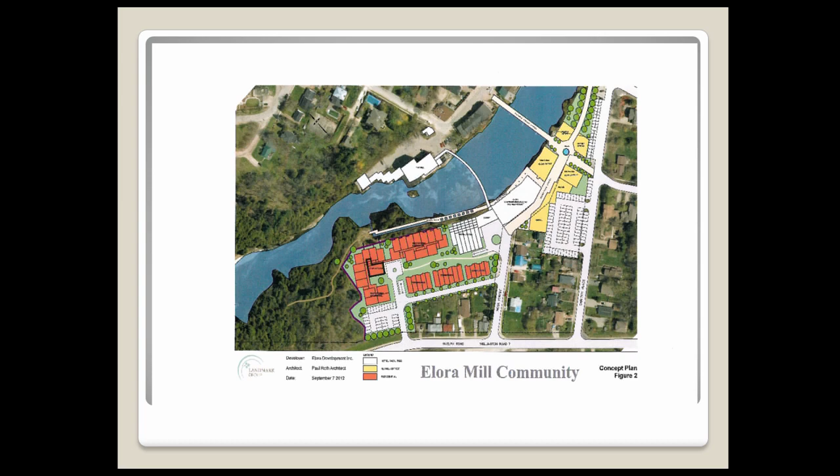We have to excavate considerable rock in that area to create underground parking for the condominiums. If that were to happen, the Potter Foundry would have been taken out of the public realm entirely, becoming the property of the condo association and run by the condo board, which didn't guarantee its integrity going forward. So a second concept was developed.

This is the plan we've been looking at since 2013. We changed the configuration of the building to a U shape so that a courtyard was introduced in the middle. This offered better views for residents in the building, and broke up the building massing along the trail. You can see now that the hotel is more articulated with a pool.

You'll see the activity center on the south side of Wellington 7. That will be a construction staging area for the condominium work, but ultimately function as an activity center administering winter activities on the GRCA land, which we butt right up against on the south side. We've been in talks with GRCA about extending those uses, things like snowshoeing, cross-country skiing, possibly dog sledding, just to create that enticement for people to come out and visit in the winter.

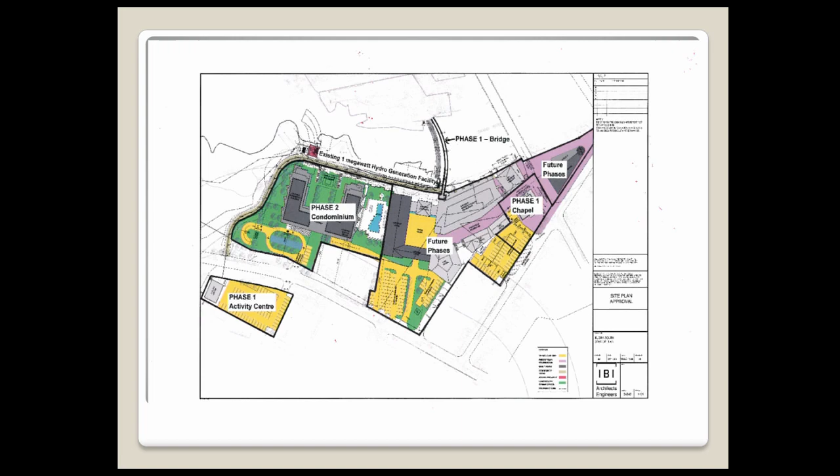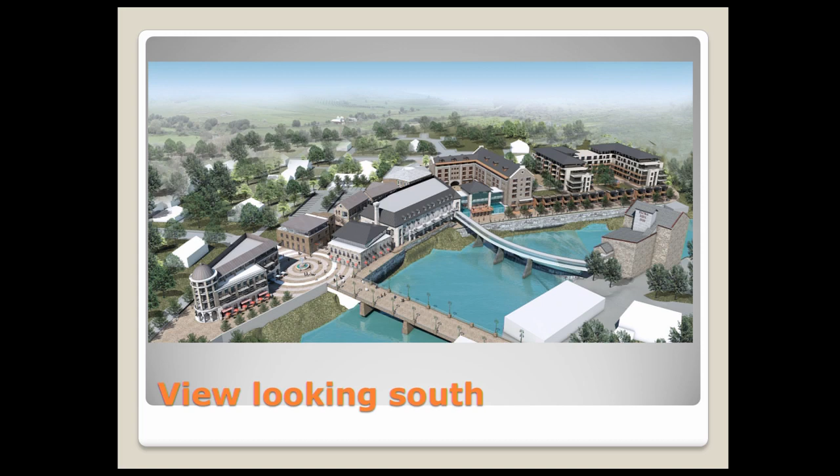Likewise with the hotel use, the banqueting use, the restored Walser building, the LFL building. The advent of the McDonald Bridge being in place really allows us to focus on the programming of that space at the terminus, the kind of semicircles that are there. We've always viewed that as being a wonderful opportunity for programming for the public, as will the bridge itself.

All the way from the river up to Wellington 7, looking for essentially two things. We were looking for an area that provided a grade difference very similar to what the building is sitting on now, which slopes towards the river. Secondly, an area that would have the least environmental impact on the ESA. So those were our two objectives.

From a heritage viewpoint, the objective was to keep that building as close to the current location as we possibly could, and this is where we ended up. We were about 70 meters away from where it currently is, but we have a very similar grade, so it can be constructed or reconstructed in the same fashion as it is now, without losing any of the existing heritage attributes of the building.

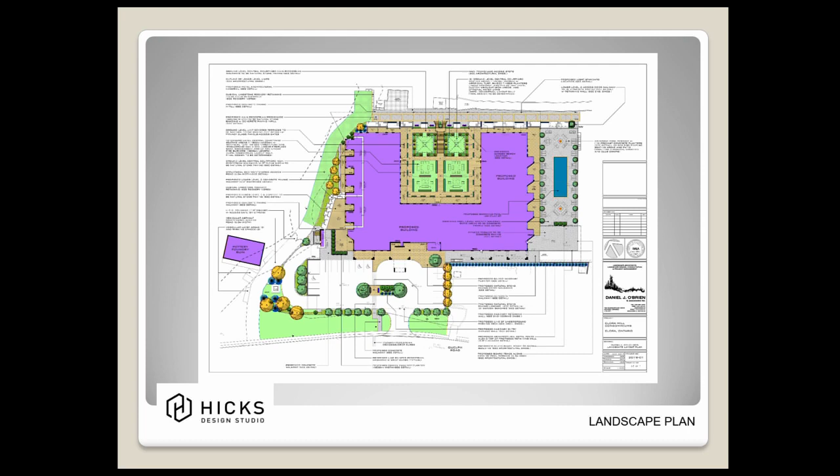This also shows the trail system and the ESA. We've got some considerable buffering, mostly in the form of tree plantings, between the existing 3 residences on Wellington 7 and the building.

Here's another one that shows the community trail. From Wellington 7, this is already existing because it was constructed as part of the hydro plant work. You can see the trail coming down the west side of the condominium and swinging around and paralleling the river. The grade there has been pretty much set right to the end of the condominium building. That land there for public use constitutes about 10% of the condominium site itself. The dark line you see is the limit of the ESA, so you can see it runs right along the edge, and I think ghosted in there, you can probably see the relocated Potter Foundry as well.

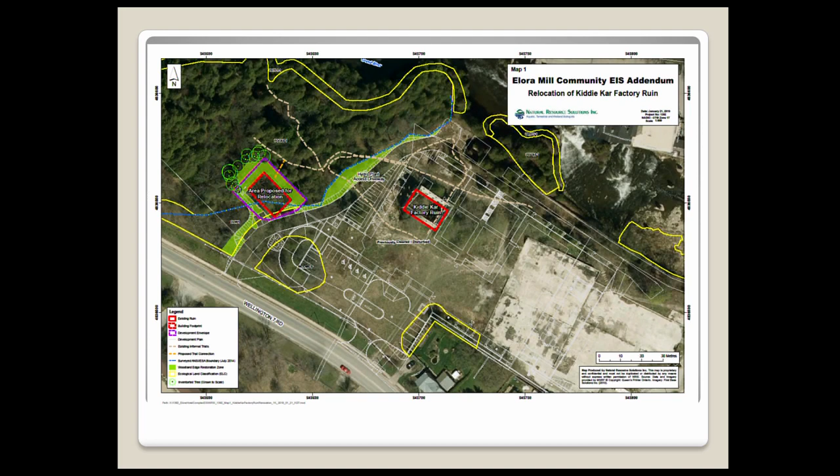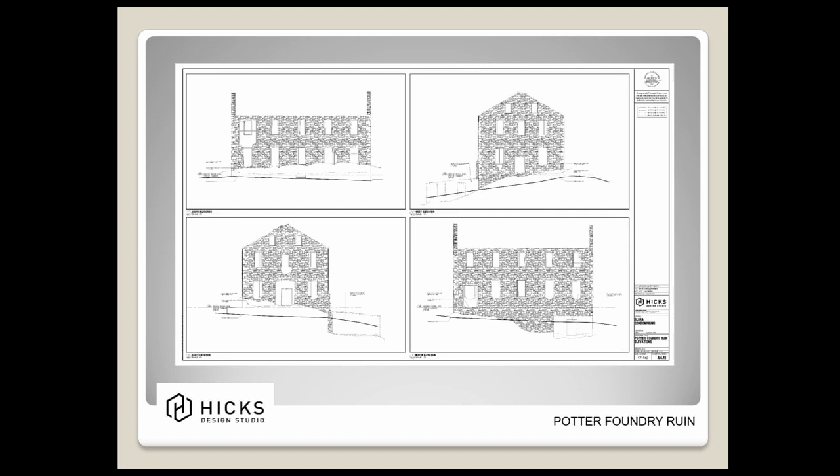This is our laser pickup of the existing ruin. This will be used by Tacoma, our engineers, who will be in charge of reconstruction of the building. Obviously we're going to have to meet some building code requirements in the reconstruction. It will be left as a ruin, but it's got to be made safe for the public, since we're going to be bringing people through the building. So between our engineer and your CBO, we'll be able to figure that out. This will also form the basis for as-constructed drawings for the foundry.

Height, as described in that bylaw, is 18 meters from the Wellington Road side of the building. 18 meters is 60 feet, so that was established as the height. The residual, as we come down the slope, was going to come down to the trail, and it is essentially the height of the townhouse units.

So we've got 5-story towers and 2-story townhouses. That's why you've got that 7-story on the riverside and 5 where it needs to be described by, and to comply with the zoning bylaw, that's where we need to be on the Wellington Road side. The building as submitted is actually a little bit less than 18 meters. I don't think anybody with a naked eye is going to see a difference of 2 feet, so we're just saying that we comply with the bylaw.

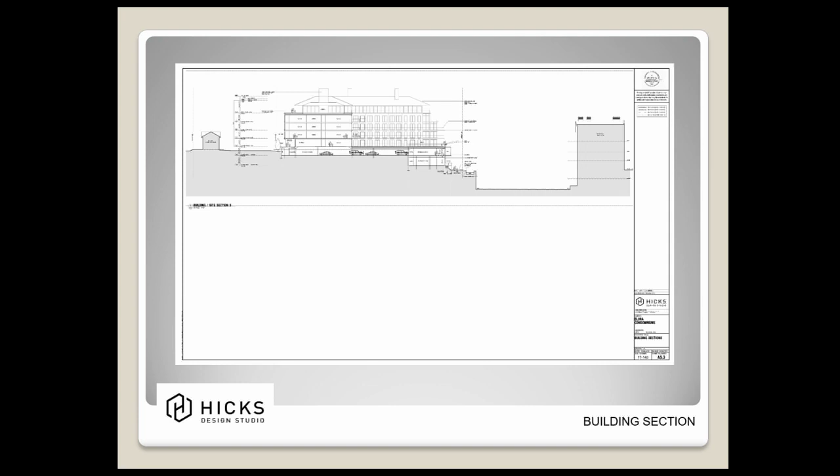The architect produced this one to show the relationship between the condominium and the Elora Mill on the north side. The land on the south side of the river is higher than on the north in any case, but this shows the Potter Foundry, the condominium building, and the height of the Elora Mill.

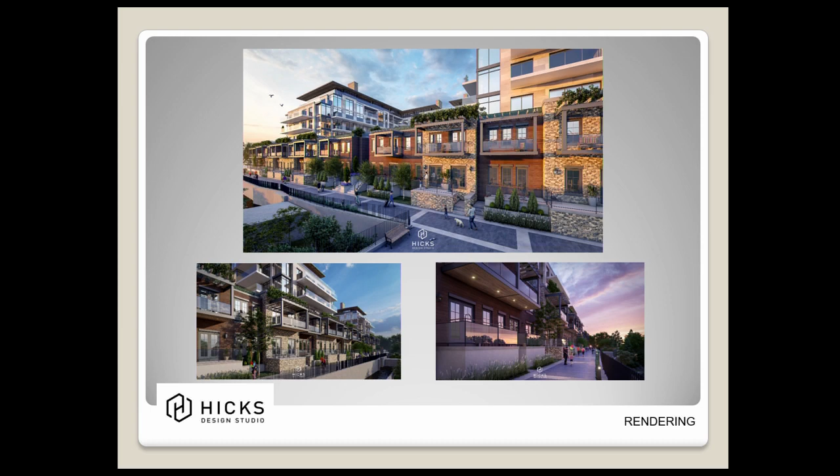And the color palettes are going to be very similar to what you see on West Mill Street, with the completed Elora Mill buildings as well. Same kind of street furniture, lighting, windows, all the punch windows. And there's another example of the kind of implementation that we intend to pursue.

Here's the trail system. This really reflects the access easements that are going to be given, and that's going to be a consideration for this council today. And then the ESA area, you can see our trail running right through the environmentally sensitive area.

So when they flew the coop, as it were, and lodged themselves into the side of the gorge for winter, that was our opportunity to reconstruct that building, and we had to have that construction done by about mid-April in time for the bat colony to come back. We had a survey done after they got back, and we got pretty much all 300 back. So we've got a success story there.

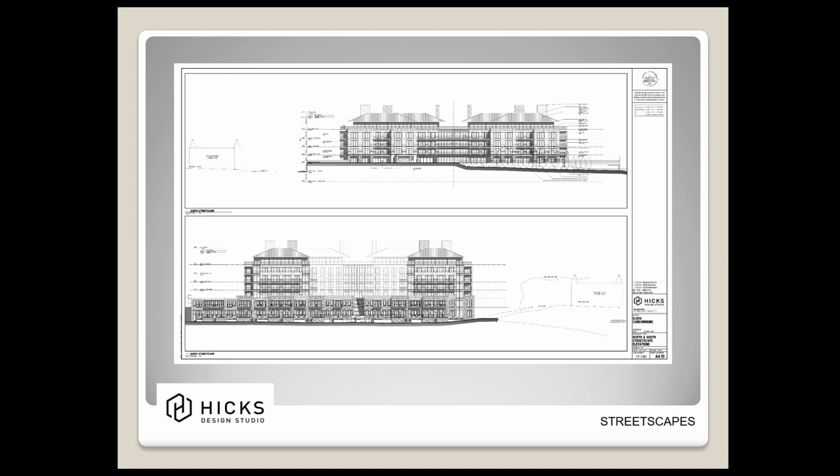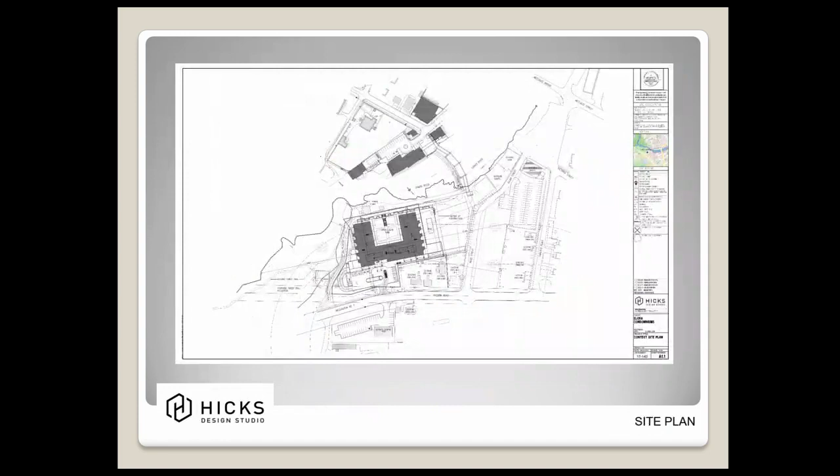Councillor Van Leeuwen: Thank you, and I think there's something for us to remember, that we take this somewhat piece by piece. This is a heritage impact assessment aspect on this building. The development itself is not in a heritage site where you need to meet certain regulations, other than this building. Correct me if I'm wrong, Mariana, but I think that's where we have to focus. Other than this building being moved, this is what we're talking about today. We shouldn't get too far into the conversation about what it's going to look like, because that's really a development aspect further down the line. If we can keep the focus on that.

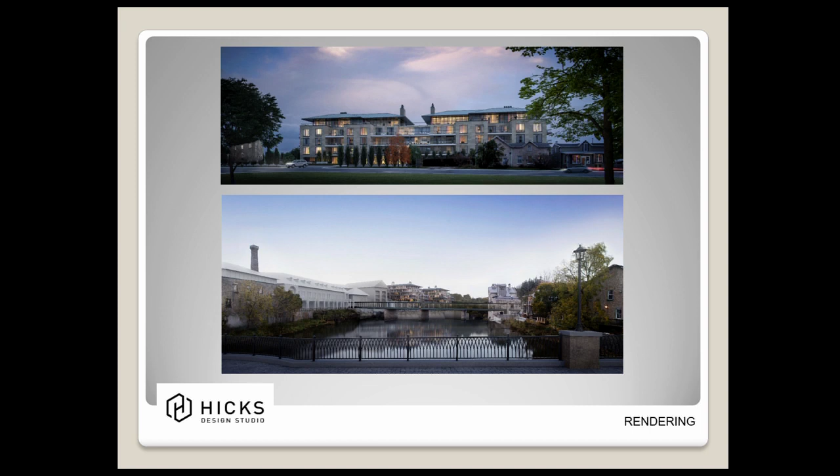Councillor Kitras: In response to Councillor Van Leeuwen, almost all the pictures are about the condo development, so it is part of the discussion, and that's what we're kind of talking about. Let's take this picture here. It almost looks like it's the same height as the mill, but I don't see any information here about the actual elevations, like comparable. Is it the same height as the mill?

I believe it's slightly taller than the mill, because the land on the south side is higher elevation than the land on the north side. When I looked at the Potter ruins where they stood, and compared them from that site, the Potter ruins are actually higher than the spa, and they're only about 10 feet, I would estimate, lower than the mill. And that's only 2.5 stories.

So now I'm just, because these are Photoshop on a flat surface, it doesn't give you the right perspective on seeing how this will impact your visual sight. You need to see the volume and the scale. That's just how 3D is different than 2D. You can give impressions of 3D through shadowing, color and texture, but I don't even know where this is taken from. It's actually taken using a drone above the river, to photograph from that perspective.

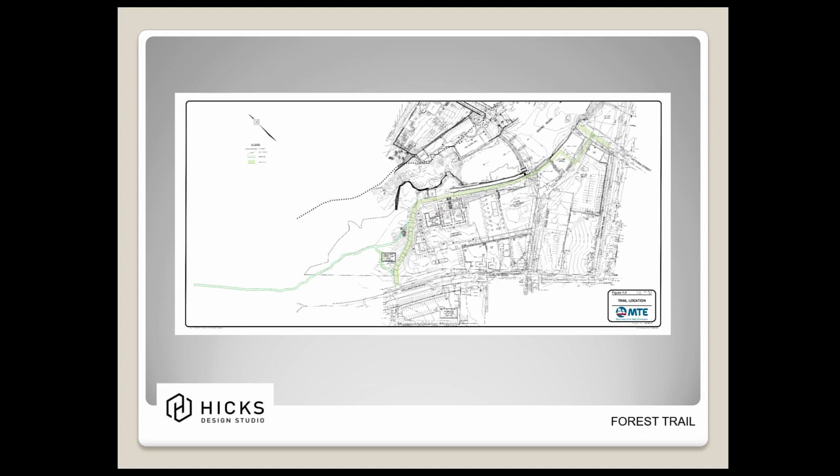Moving on to the easements on the Elora south side, and we have Andy going to be talking about public access and trails and that kind of thing.

Thank you, Mayor Linton, members of council. So as Brian had mentioned through his discussions, and as we've always worked along with Pearle, the importance of public access along the property on the south side of the river.

So we have been working away all the way through this project, and the map that you see on the screen today outlines the easements that we are looking to protect. We already have some easements that were protected through the purchase and land sale that we did with Pearle several years ago, and there are a number that are already currently protected in some of these easement areas.

But what we're looking at doing is protecting public access and the infrastructure. So the gold color is mostly the infrastructure that is current, as well as having to protect in the future. The blue, on the upper right-hand side, is the Victoria Street right-of-way. That is currently protected for easements, but we're enhancing that to include pedestrian and cycling because we'll be at the end of the bridge, and we want to ensure that.

The yellow line that you see is the future trail connection that will come off of the development just west of the Walser building, accessing down to the trail and then underneath the future Pearle Bridge. The lighter blue trail access is what we've been talking about this morning, coming down through the hydro corridor and then back up through to County Road 7.

And then the green - it's a little difficult to show all of this in one context just because of the magnitude of the property - that is the ESA lands that go all the way along the river corridor. We are looking, as Brian mentioned previously, to protect that through a public easement across all the trail system that's already in. Recognizing that as part of the ESA requirements, we do want trails throughout that whole entire ESA area. It is to be protected, but this does follow the line of the existing ESA trail.

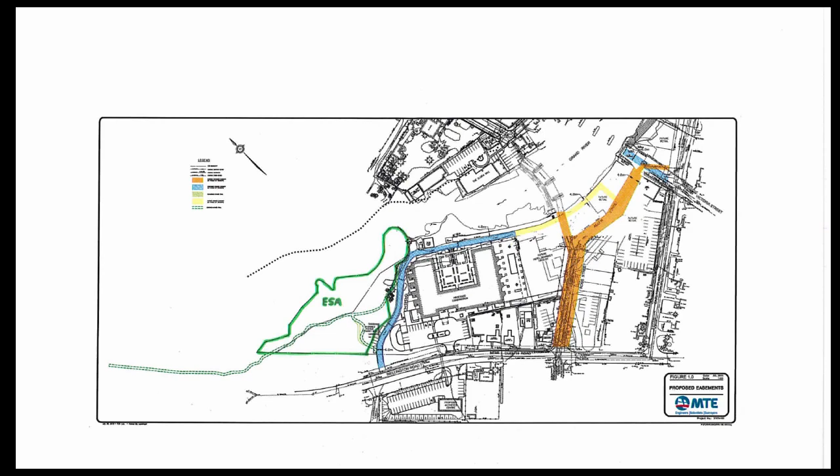Next item, site plan control bylaw and holding zone removal. We have a report from Brett Salem. Thank you, Mayor Linton. So the other requirements of the holding zone removal, in addition to the heritage impact study, is passage of a site plan control bylaw. We put that in the secondary plan because at the time, the county had just adopted an amendment to its official plan that gave it additional authority under site plan control to review, or for municipalities to review or comment on matters of the exterior design.

Prior to that, the authority wasn't there, so the public sometimes thinks we have authority to say your brick should be this color or that color, but we really don't under typical site plan approval. So with site plan control, in order to do so, you had to have appropriate policies in your official plan, and then put it into your site plan control bylaw.

So the county having that policy framework in place, when we adopted the secondary plan and the zoning bylaw for this, we said that we would put such a bylaw regulation in place. I've prepared a bylaw, and it includes the principles, as Brian mentioned in his summary. Those are the agreed upon design principles that Pearle is adhering to in their building design, between the architectural review and the heritage review.